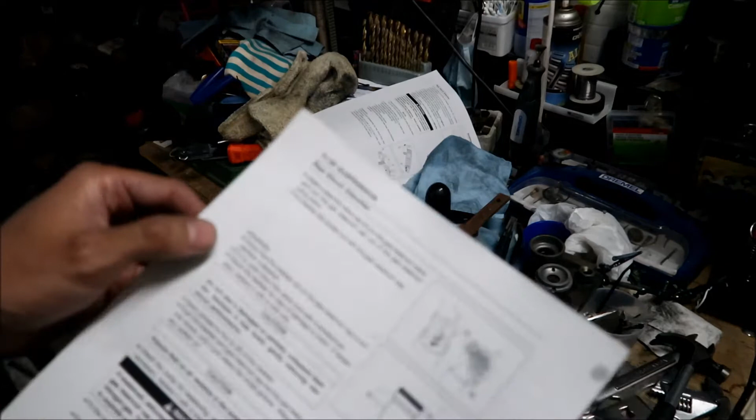Okay guys, I've cleaned it as best as I could, alright? So I've got it hooked up to my little jig here, and we're gonna go reassemble the shock. So the first thing we gotta do is put the bladder back in, okay? So assembly, check that the bladder on the gas reservoir cap is not partially collapsed.

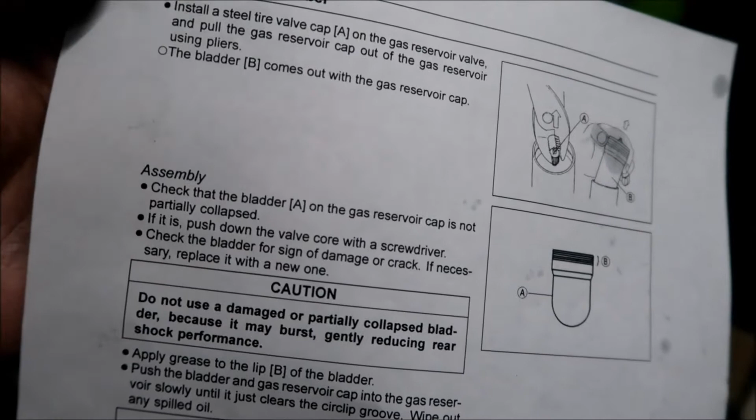Okay, so under here, under assembly, it says check that the bladder A on the gas reservoir is not partially collapsed. Okay, if it is, push down the valve core with the screwdriver. Okay, so there's the bladder. It is kind of collapsed, but not really. I did open it earlier, so that's why it's not. Just go get a screwdriver and open it if it's collapsed. Okay, but right, that looks okay.

I'm back. My camera ran out of juice and I'm getting cramps and stuff on my hands.

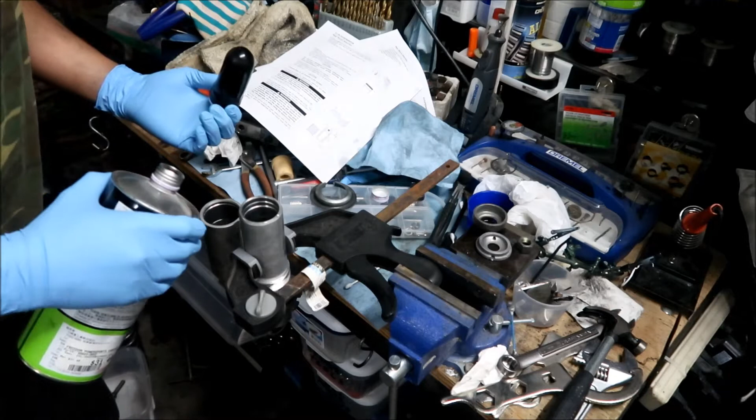So anyway, what we're gonna do is I'm gonna rinse this, we're gonna fill this guy up, and then we're gonna rinse the bladder because there might be some stuff from the napkins on there. So this, it doesn't say this in the manual, okay? It does not say to do this in the manual, but I watched the video online and that's the way they did this. So what I'm gonna do is fill up the reservoir halfway or something.

Okay. And when I pour it into the reservoir, it fills the other one up. So I guess you're gonna have to fill both of them up. So just kind of stick this in there. You probably only want to fill it up about halfway. This is really messy. I do not like doing this.

Okay, and then I'm going to go ahead and rinse my bladder off with fresh oil. Okay, I know it's so wasteful, right? It does say to put some kind of grease on it, but we're just going to use the oil, okay? And I got a new fresh pair of gloves on, so I'm just putting oil all over the bladder, and then we're going to stick it back in there. I'm just gonna kind of lightly put it back in there for now. Okay, so messy.

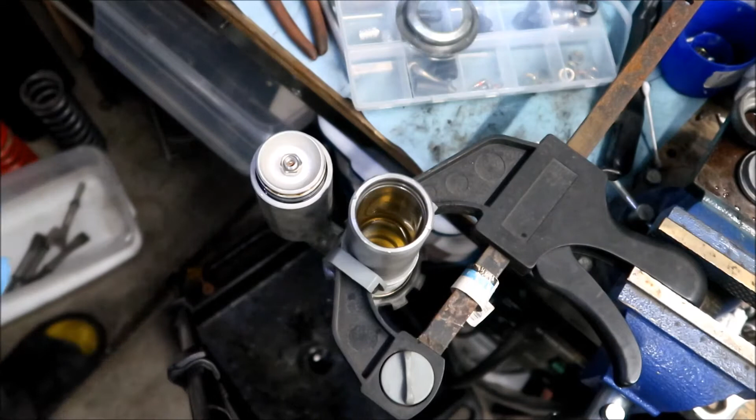So I'm just gonna read what it says on the manual now. It says check the circlip for weakening, deformity, flaws. If necessary, replace with a new one. Okay, here's the circlip. This is the one for the reservoir. I made sure and cleaned it a little bit. Maybe I might want to put a little bit of lube on it. Okay, so fit the circlip in the groove in the gas reservoir.

So I'm thinking you've got to push this in here, okay? And this is the part that's really messy. So you want to make sure there's no air in there, so that's why we filled it up. And we're going to push the reservoir in there, and I lubed it up. Hopefully it doesn't fall off my little thingy here. I'm going to support it. Okay, there we go.

And then we're going to use our socket. Where did the socket go? I lost my socket, but I think I found it. Okay, so I got my socket here. We're going to use that to drive this puppy inside, and you gotta drive it in there far enough. Oh, look at that. No fluid came out, but it's forced. You can see it's forcing fluid into the shock body.

Okay, so you're going to want to push this down about 10 millimeters, until you can see the groove for the circlip, okay? That's the groove right there. And now we got to put the circlip back in. Here it goes. Wish me luck. This isn't a very secure platform, so I can't really do much with it.

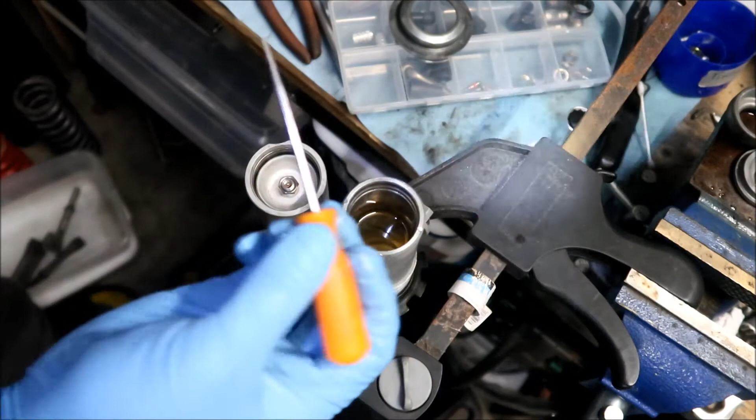You just kind of want to walk it in there. Excuse me for the heater sounds. Okay, there we go. So make sure the circlip is in there properly. I'm gonna go get my little pick here, and then I'm gonna just move it a little bit sideways if I can. So that'll let me know it's seated. So it actually was not that messy. Okay, yeah, I saw it moved a little bit, so I know that's properly seated.

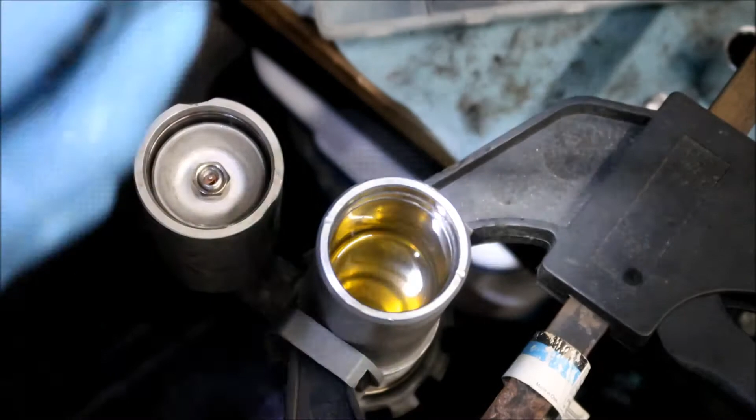Okay, so that's there to keep the bladder from popping out. So now it says pull up the gas reservoir cap against the circlip. The cap must be 1 millimeter lower than the end of the gas reservoir. Okay, so basically you just pull up on this with a pair of pliers until it seats on the circlip. That's as far as it's gonna go.

Okay, so make sure you have the metal valve cap or a nut, like a tube nut, so you don't damage the threads. Okay, I'm just gonna pull up on this guy.

Okay. Okay. That's it. It's about as far as it wants to go. Okay, and you saw some of the fluid, the oil went down. Look at how clean that fluid is compared to the stuff that we took out. It's kind of like a golden color.

It kind of looks like pee, sort of. Like your beginning stages of dehydration.

Pee. Okay, now it says fill the rear shock body and gas reservoir with specified oil, and then reassemble the rear shock body. See oil filling. Okay, so we've assembled the reservoir. Now we're gonna go fill up the shock body. Okay.

Okay. So before I even put oil in it, I should have tightened the bleeder valve. We're gonna have to open it again. But also another thing is you want to make sure that the O-ring on the bleeder valve is still good, okay? And the O-ring still looks good on mine, so I'm not going to change it. Okay, so make sure it's nice and snug so it doesn't leak.

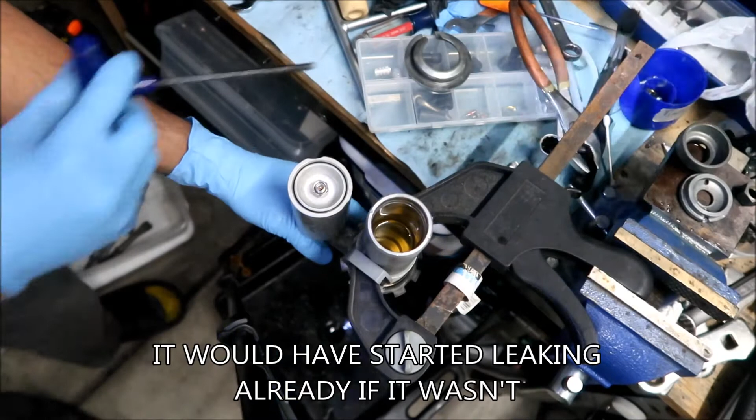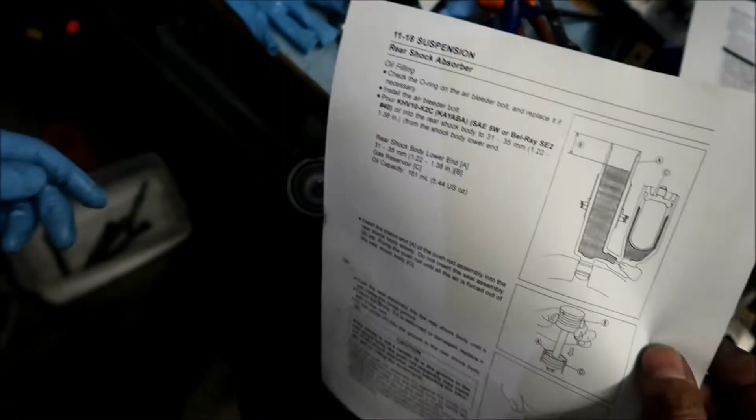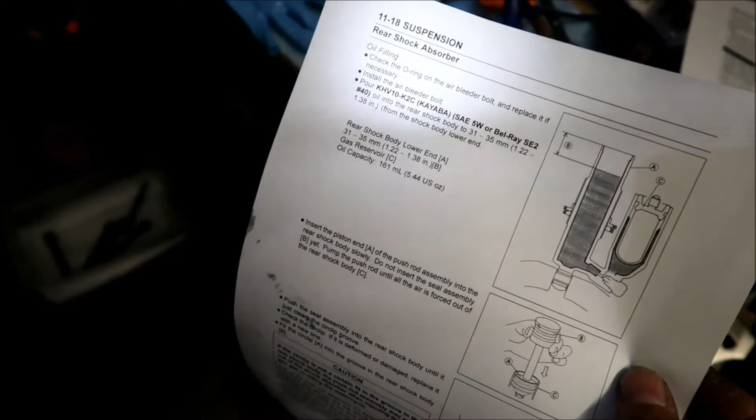All right. Okay, so we're going to go back to oil filling, okay? So we actually jumped ahead in the manual a little bit to reassemble it. It's kind of weird the way they tell you to do everything. Okay, here we go. So here we're in the oil filling section now, all right? We're putting everything back together. So check the O-ring on the bleeder bolt and replace it if necessary. I already did that. It seemed fine to me. Okay, install the bleeder bolt. Oh, you did install it.

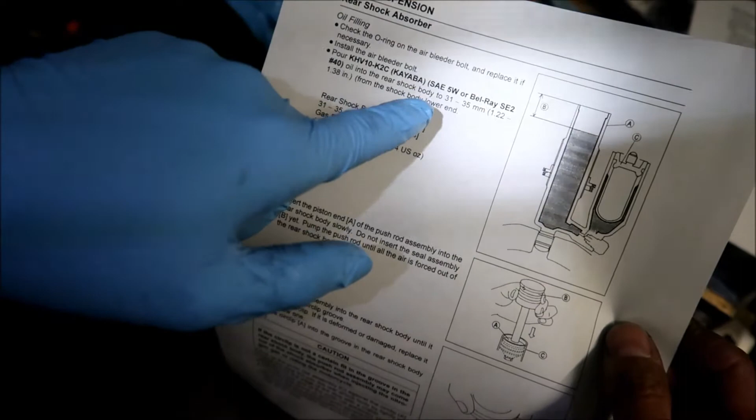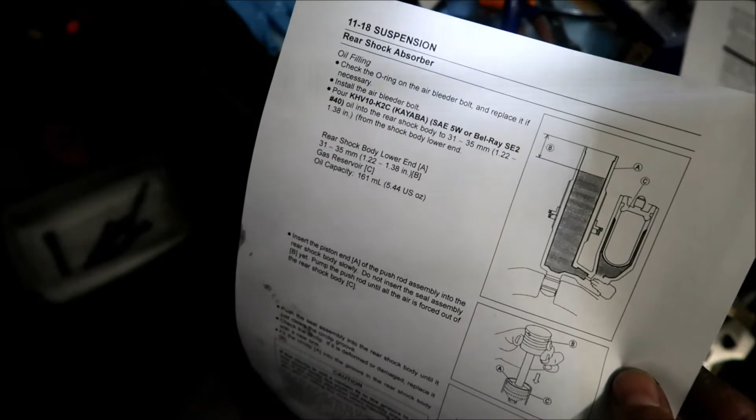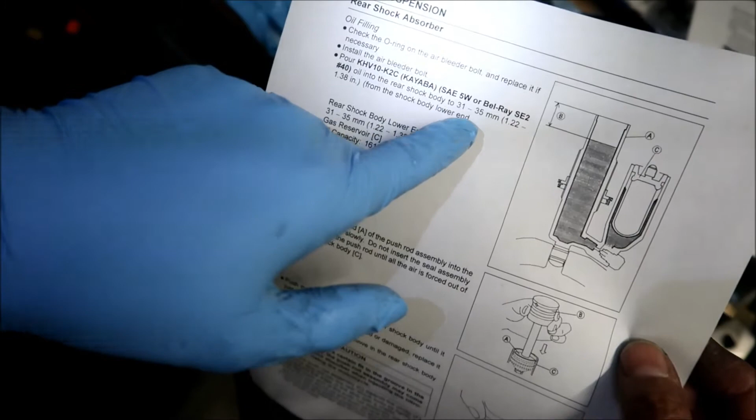Now it says pour the Kayaba or KYB liquid or SAE 5W or Bel-Ray SE2 number 40 oil. Okay, I cannot find any of that. So the funny thing is Maxima sells a 3-weight and a 7-weight and a 9-weight or something. So they don't sell a 5-weight for shocks. It's kind of weird. Okay, oil into the rear body to 31 to 35 millimeter from the shock body lower end.

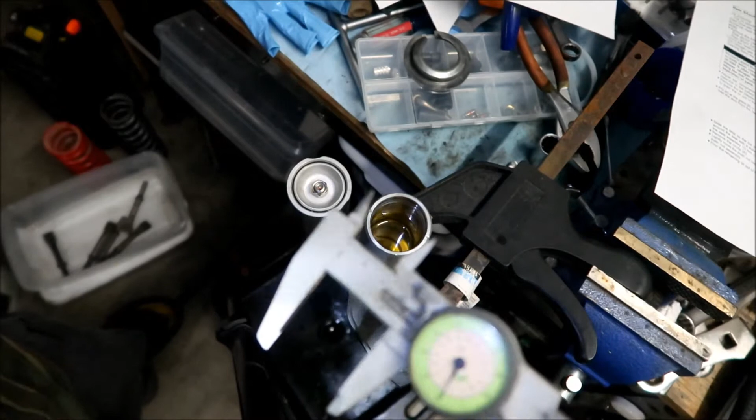Okay, so you know what that means. It says 31 to 35. How about 33? Right in the middle. It's almost what my preload settings are. Okay, from the top of the shock body. So you're measuring from the very top to here. Okay, so we need to add more. Basically using the caliper as a dipstick is what I'm doing. So we're going to add some more of this golden elixir into here.

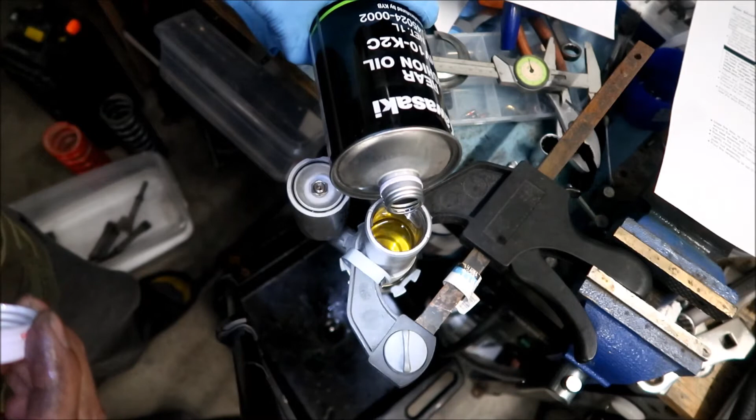Okay, a little bit more. That's probably why they give you a range, so if you kind of didn't put enough, you know, there's a range. You don't have to be super precise. Ooh, that is perfect right there. That's 33, right on the money.

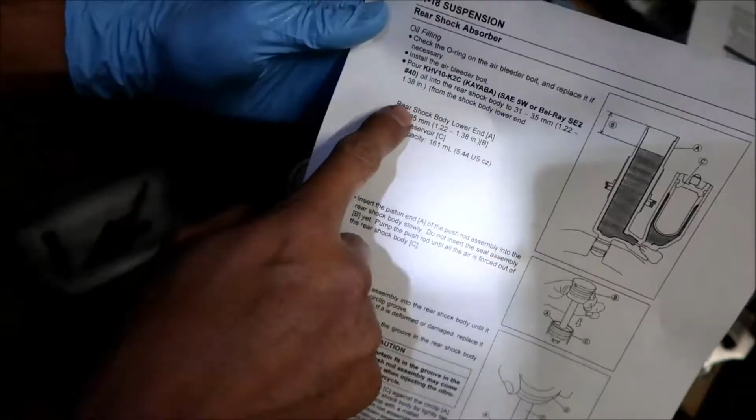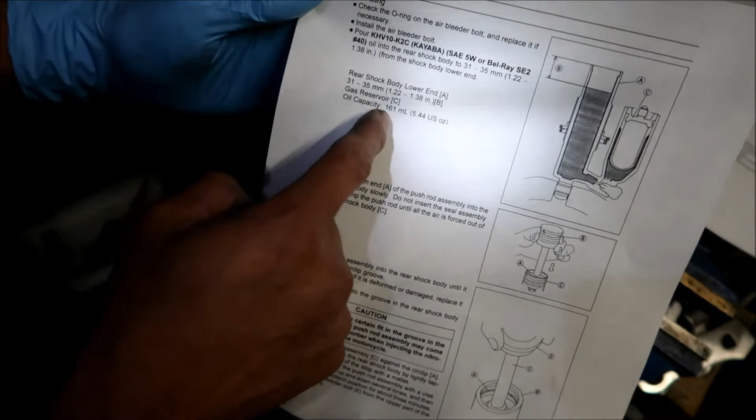Okay, so it says here, rear shock body lower. It should be 31 to 35 millimeter. That's the little diagram there. The gas reservoir is right here. We've installed it already. And the oil capacity is 5.44 US ounce, or 161 milliliters. So, yeah, you should have a lot of fluid left when you're done. There's probably enough to service like 4 or 5 shocks. Maybe not, if you're doing what Hades Omega is doing and using it to rinse parts.

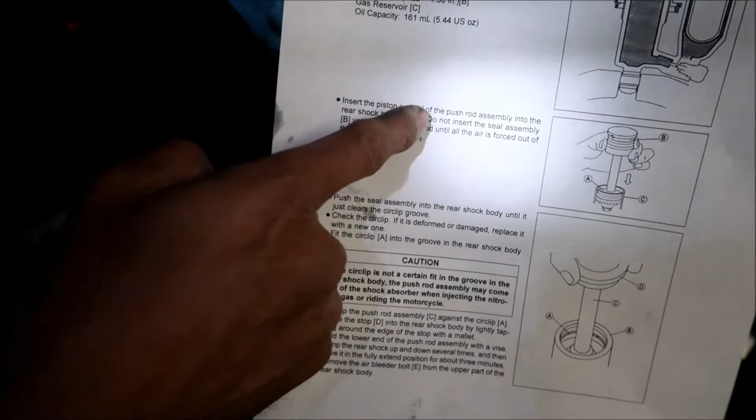Okay, so for the next section, it says insert the piston end of the push rod assembly into the rear shock body slowly. Do not insert the seal assembly yet. Pump the push rod until all the air is forced out of the rear shock body. So there still could be some air trapped in there, is what they're saying. So you need to move that fluid in there, okay?

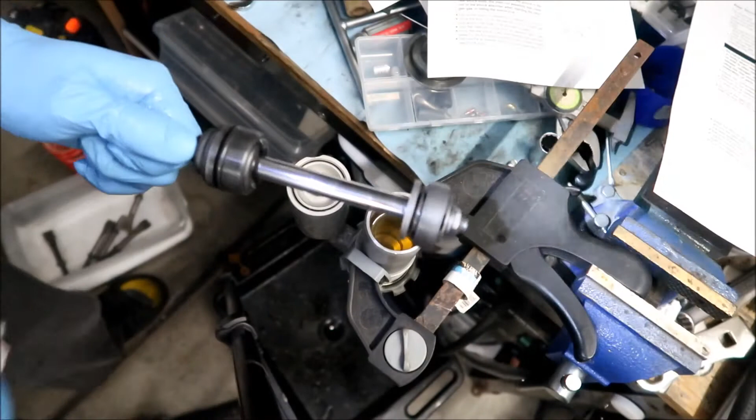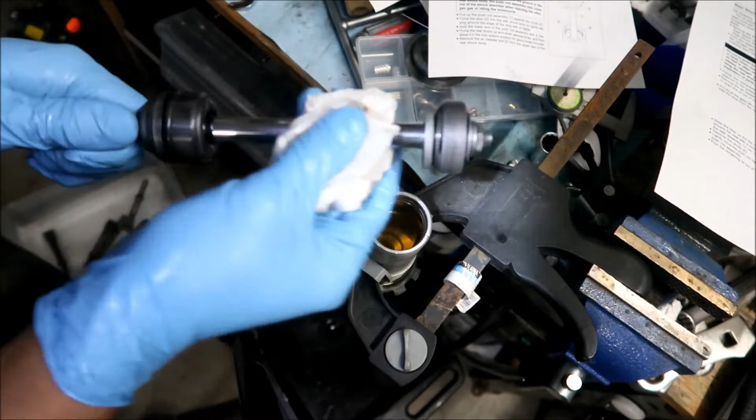I'm gonna wipe this guy down one more time. So this is the piston they're talking about, and the seal is right here. So you want to keep this out here. Don't put it in yet. Here we're just gonna pump some fluid around through it, and I'm gonna make sure it's clean. And then I'm gonna rinse it with some fresh fluid, and also make sure it's got lubrication, so when we put it in, that stuff won't happen. Okay, so I'm gonna just rinse the piston. Let's rinse the seal too.

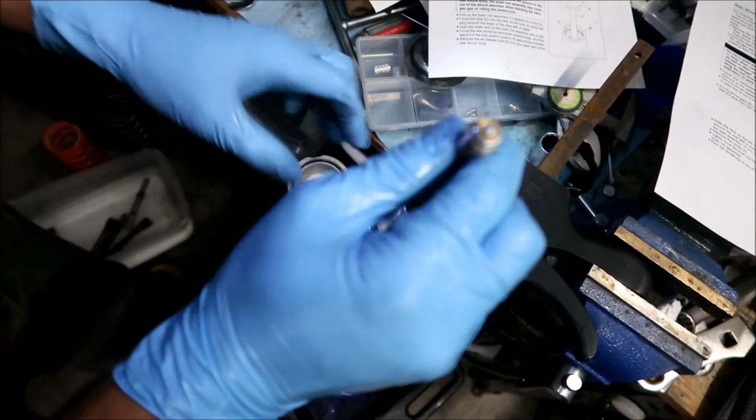I know, I got so much oil, I don't even know what I'm gonna do with this oil. This is so messy, dude. Okay, so now it says insert the piston end of the push rod assembly into the rear shock, just like so. And do not insert the seal.

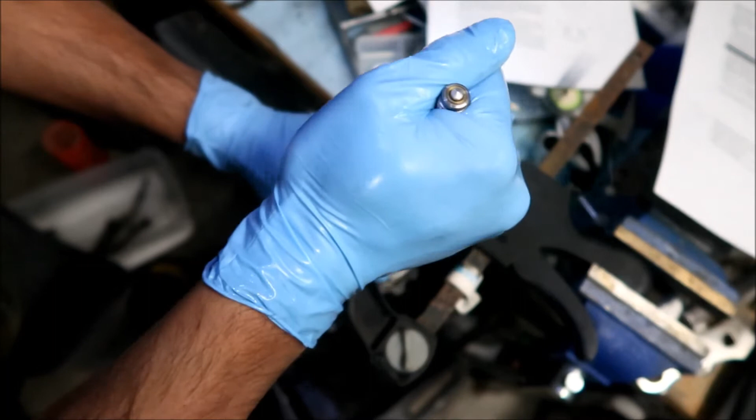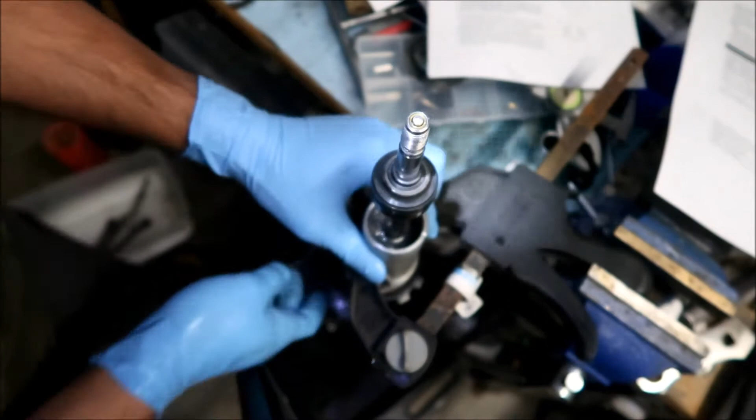Okay, as you can see, some of that, oh man, it's gonna fall now. So I'm supporting it. Some of that, there was some dirt still inside the piston, so some of it got into the fluid anyways. So you can see there's a lot of bubbles. So I probably should have, I don't know how to do that, force fluid through the piston to get all that dirt out. But now there's a bunch of dirt in the fluid, but that's okay. The fluid's still fresh, so.

Okay, it says, and then push the seal assembly into the rear shock body until it just clears the circlip groove. Oh, okay, never mind. That's later. Push the rod assembly in the shock body slowly. Do not, okay, until all the air is forced out. Okay, so just do this like 3 to 5 times. I'm gonna do it 5 times. Because there could be air trapped in the piston, I think, is what's going on here. Wow, there's a lot of resistance.

Doesn't that suck? How I tried really hard to keep that fluid clean, and then once I put the piston in, it just contaminated it again. Oh well, whatever, man. That's fine. At least we got most of the metal particles out. Okay. I'm gonna push this into there a little bit, and I think we're okay. I'm gonna take it off my little dealie here.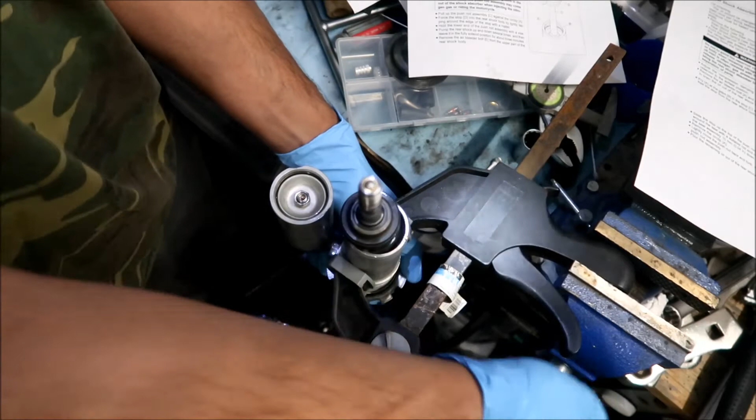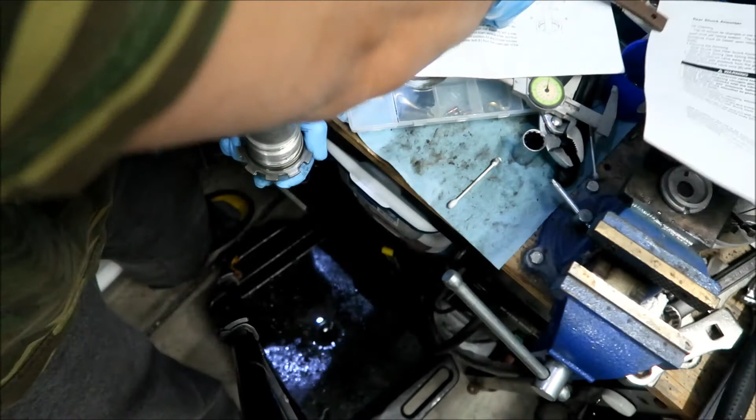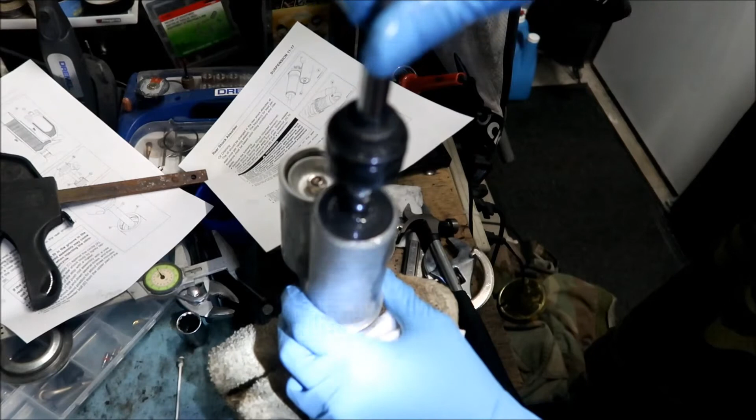And then what to do now is wait for all the bubbles to disappear. You want to make sure there's no air in it at all. Okay, there it is. On the vise, still some bubbles. Working that piston. Seems pretty smooth. Okay. I cannot believe how it's dirty again. Okay, so definitely make sure you rinse that piston off good, man.

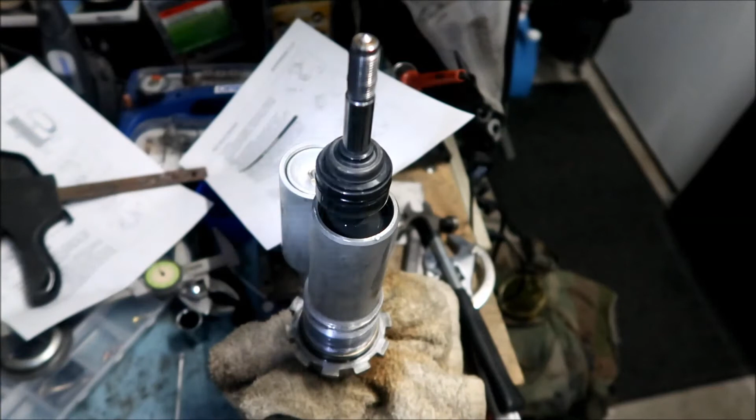Or, I hate to say it, if I was to do this again, to make sure I clean the piston, I would fill this. I know, but it would contaminate everything again. It's so hard, dude. The only way you can clean that piston is if you shot oil through it to get all that stuff out of there. Or I could have shot some kind of shock cleaner in there. But I don't recommend you use any kind of solvent to clean this, because it could contaminate the fluid and the seals and stuff. So what I heard, if you want to clean it, use the shock fluid to clean it.

But yeah, there it is. It looks pretty good, but I will let it sit for about 10-15 minutes to make sure we got all the bubbles out. And then the next step is we're going to push the seal down there, and it's probably going to make a big mess. And then we got to put the next circlip in, this guy. All right. So I'll see you guys in 15 minutes.

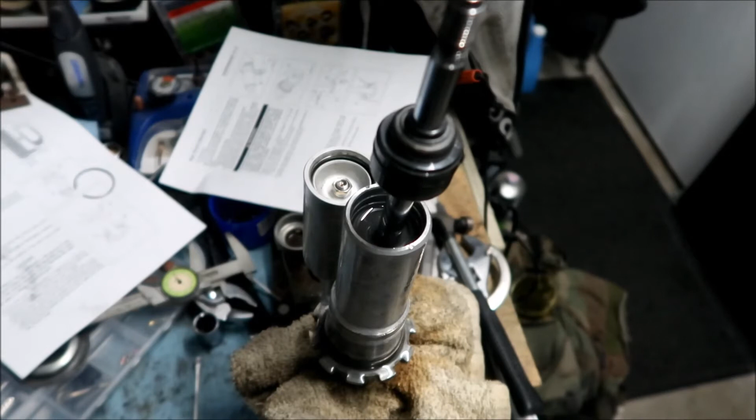Okay, it's been about 20 or so minutes. The piston actually withdrew all the way into the shock body, and it made a big mess. But that's okay. I'm gonna put my glovies back on. Since we lost a little bit of fluid, I'm going to add a little bit more. If there's any extra, it'll probably just come out. What a mess. And the fluid is already kind of tainted, so.

Alright, so the next step is to put the circlip back on, this guy, and then put the top cap back on. Here's what the manual says. Push the seal assembly into the rear shock until it just clears the circlip groove. Check the circlip if it's damaged. Fit the circlip into the groove in the rear shock body. Okay, got it. Pretty much the same idea as when we put the reservoir back in.

Okay, that's kind of weird. The reservoir kind of got sucked into there. That's odd. Not supposed to be like that. Hold on. Let me pull it back out. I don't know why it sucked itself back in there. I can't believe it. Okay, whatever. But there's definitely no more air in there. I don't see any air, so that's good. Okay, I'm going to add some more of this.

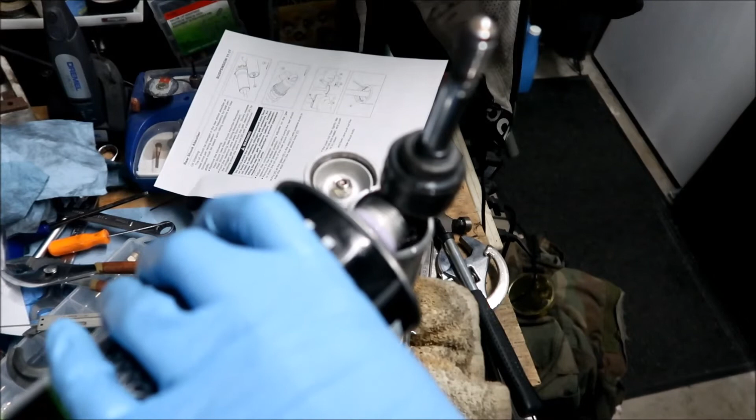Okay, so I'm gonna put this on my little shock apparatus. I'm gonna push the seal in. I'm gonna support it with the bottom of my hand so it doesn't fall out. Okay, this is the messy part here.

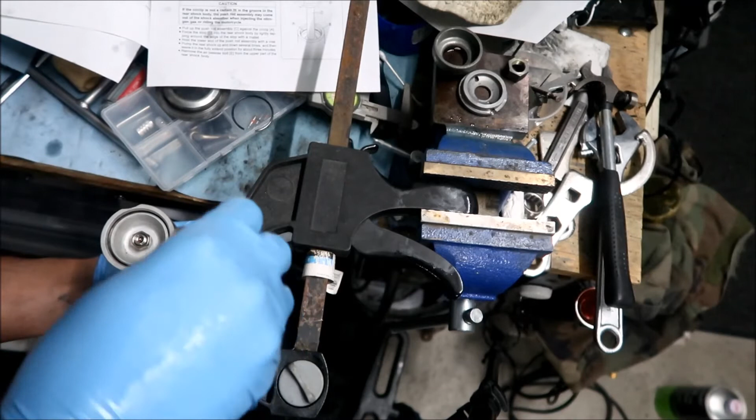Okay, this is the tough part here. So we need to push the seal in enough where we can get this guy in there, so we can put the circlip in there. And I cannot even see the circlip because this thing is full of oil. Okay, I think that's good. I cannot even see the groove. It's way in there, man. So you gotta really drive that sucker in there.

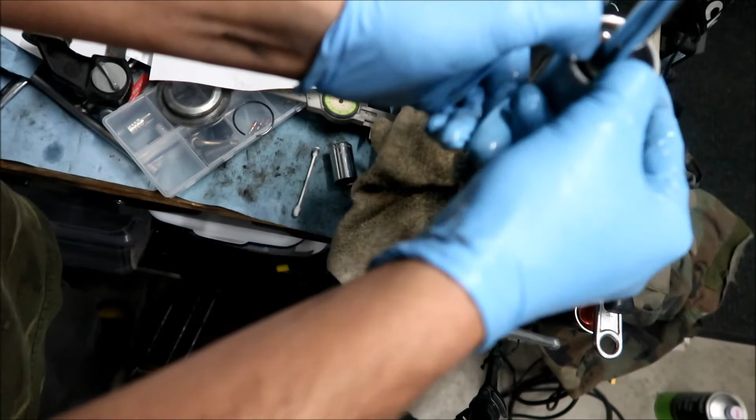There's nothing for me to drive it in with. If I had like a big socket or something. Okay, there we go. Okay, I can see the groove for the circlip. I think it would be best to put it back on the regular vise now, so I don't have to worry about pushing on it. I don't think it's gonna make much of a...

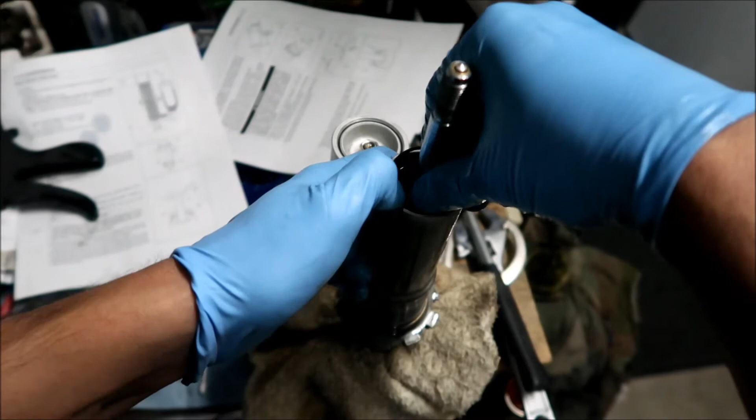Okay, so now I can see the groove for the circlip. We're gonna go put this in here. We're gonna hopefully walk it into there. Okay, push this down. Then let me get a screwdriver. This has to be pushed quite a ways in there. Screwdriver, and then push down on the circlip. Okay. Okay, I felt it seat.

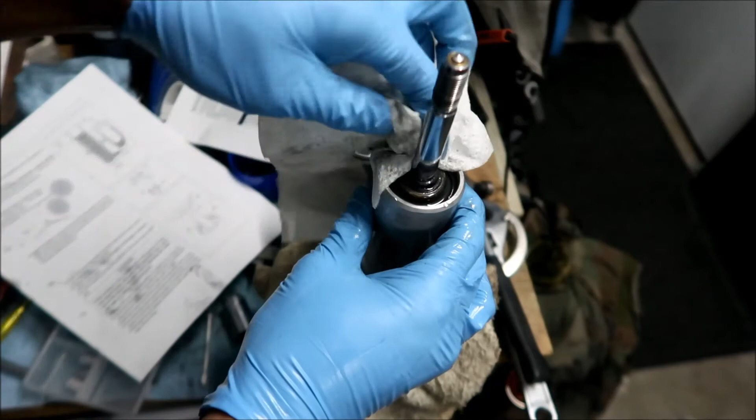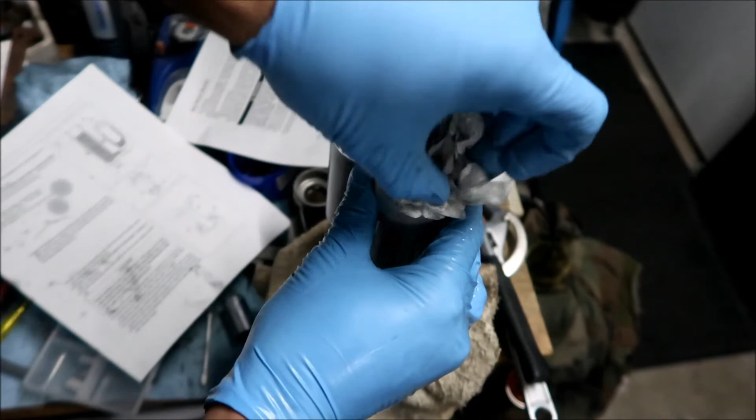Okay, I think it's seated. I don't think it's going anywhere, but I'm gonna go wipe all this oil off so I can kind of see better in there. This is just oil everywhere, man. Okay, I'm gonna get a bunch of Q-tips and suck up all that freaking oil, man. I can't tell if it's in the groove.

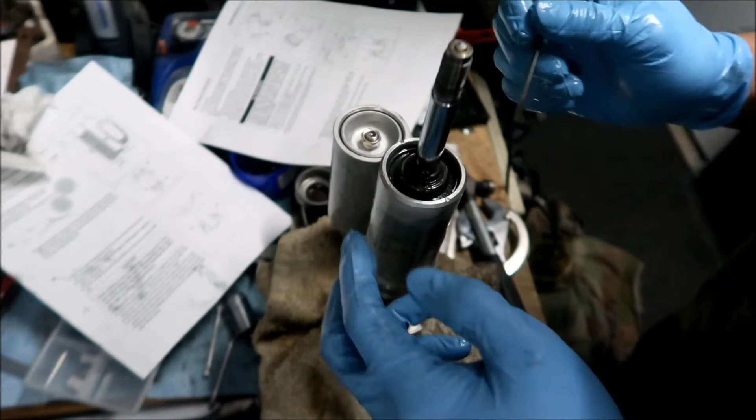And no, it was not seated, see. Because once it's seated, it's not gonna come out. You shouldn't be able to push it anymore. I think I went too far. Okay, and then you're gonna want to move it around to make sure it's seated properly. Okay, yeah, I think it is seated properly. Okay.

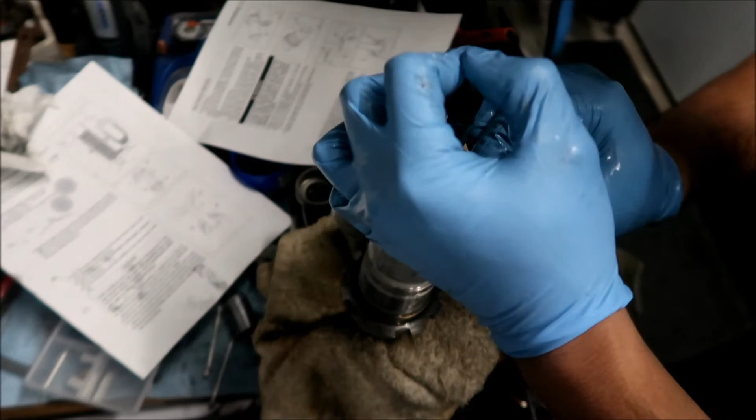No, it's not. See, it popped out. Damn it. Yeah, it popped out, see? So you got to make sure that circlip is properly seated, else this will just pop right out.

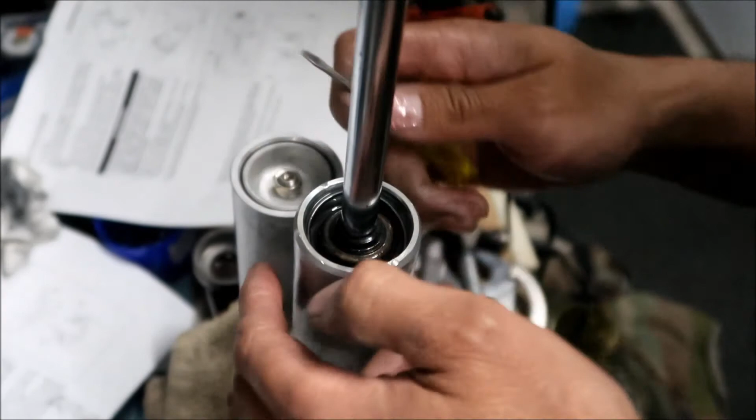Okay, so what I've done is I've actually moved it too far out, okay? It's too far down. So I'm just gonna move it back up. Oh no, it's all the way down there. Okay, never mind. I didn't move it enough. It's way down there, guys. So you really got to get that clip way down in there. There we go. Okay, now it's properly seated. Yeah, it's got to be way in there, guys.

There's two grooves. I think the first groove here is for the cover, okay? This guy. All right, that's just to stop that from keep on going, okay? But there's a second groove, okay, all the way down there.

So it says pull up on the rod assembly against the circlip. Force the stop into the rear shock body by lightly tapping around the edge of the stop. Oh, no, that's the... So fit the circlip into the groove of the rear shock. Then pull the push rod assembly against the circlip. Okay, so... I think they mean pull, not push.

Just to make sure this thing is seated properly. But what I'm gonna do is I'm gonna force it. I'm gonna push the circlip. Okay, so it moves around in a circle. Okay, just to make sure everything is properly seated. And it looks like it is. I'm gonna clean up some more of this oil here. I'm telling you, super messy, man. Super messy.

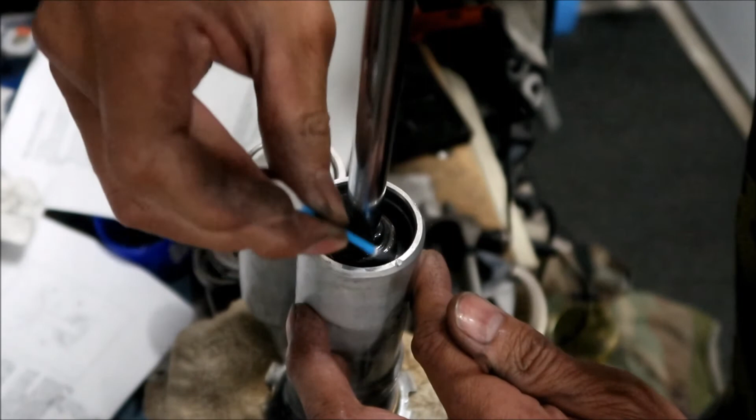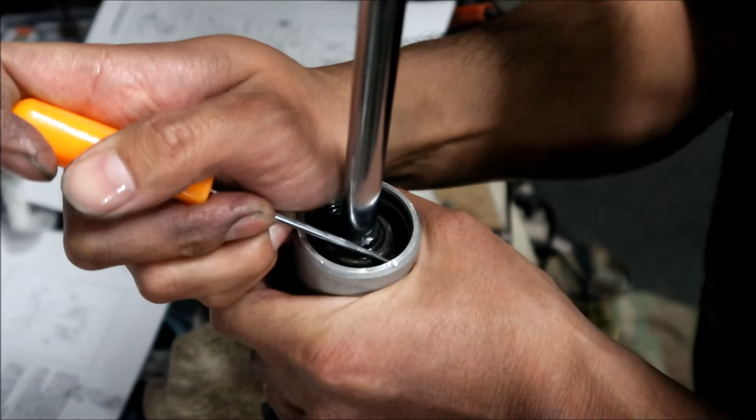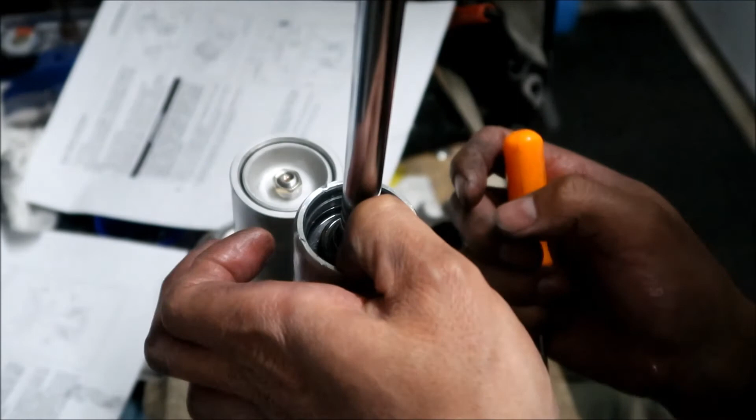Let me get the pick. The pick probably works best here. Okay. So I'm going to get the pick and push on it. See if I can get the whole circlip to move around, and I can't. Okay. Well, I think it's fine. Just make sure the clip is seated properly. Okay, I think that's fine. So I'm gonna go get some more Q-tips and soak up. Get a napkin here.

Okay, so that's it. We're pretty much done. That's the hard part, the messy part. Okay, and then I'm gonna clean out all the oil from here, because there shouldn't be any oil here. Alright, now it says to pull up on it to make sure the circlip is seated properly, okay? So just pull up on that sucker, just to make sure it doesn't pop out.

Feels like there's kind of some air. It kind of like farts when I pull it up all the way. It's kind of odd. Hope I did it right, guys. Okay, but that looks okay. It's not coming out. So now we got to put this back on.

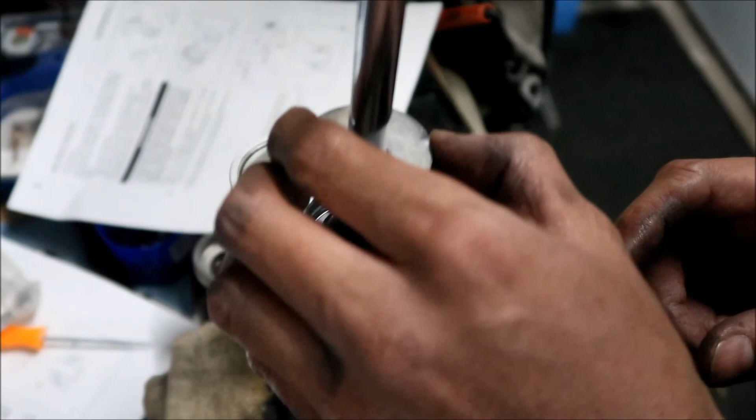Okay, so force the stop into the rear shock body by lightly tapping around the edge of the stop with the mallet. Okay, so this is the stop right here. I guess this guy is to keep it from moving more. Okay, and then you got to use a mallet, I think is what it says. Yep, I got one of those. Okay, I got a dead blow hammer here, and we're just gonna put the bottom cover back on.

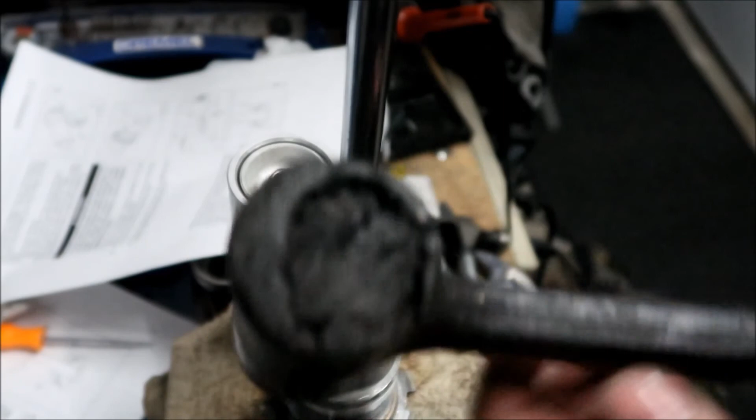Remember, this is pretty hard to get off, so I'd imagine it's going to be kind of hard to get back on. Just tap around it, put the cover back on. Okay, and just keep on doing that until there's no more gap here, okay? Okay, I'm wiping the shock body clean. So next thing to do